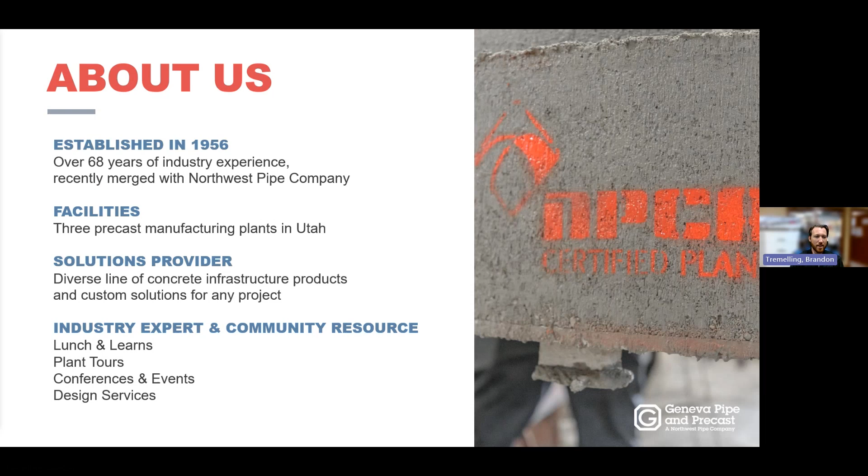I will introduce myself. My name is Brandon Tremelling. I'm the Technical Resource Engineer for Geneva Pipe and Precast, which means that my job is all about being an industry resource for our industry of engineers, contractors, agencies. My company, we've been around for 68 years now, and we were recently acquired by Northwest Pipe Company. So we're part of a much bigger national presence that provides ample opportunities for us to learn and coordinate and collaborate on different challenges that affect our industry nationwide.

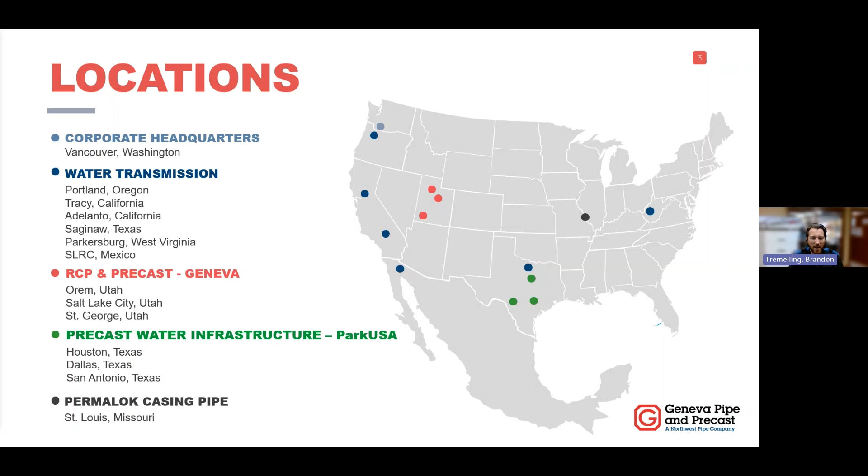So as I mentioned, we are part of a much larger group that provides ample opportunity for us to learn from each other. And our attendance today, the registrations we saw are from a pretty varied group. So some of the content that I'm going to cover today is more specific to Utah, where I'm based out of and where our Geneva pipe plants are located, those red dots you see on the map there. But if you have specific challenges somewhere else that may not be quite as relevant to Utah, please feel free to fill out that survey and we'll try to create content that might be more based on your local region.

So our agenda for today, I want to start off by talking about the impact of infiltration and inflow on sanitary sewer collection systems, and really what that looks like in terms of impacts you can have on your local communities, as well as the impact of cost in mitigation or even reactive situations. Then I want to talk about all the different points of infiltration and inflow in a typical storm sewer or sanitary sewer manhole. And we'll go through different ways to either protect or rehabilitate/mitigate these problems at those access points.

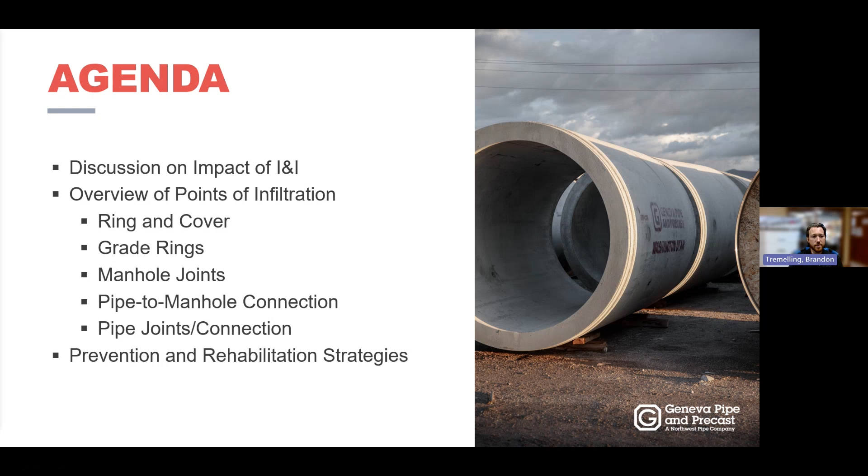And in doing so, I'm hoping that this will allow you to take this information back to your communities and really help make an impact, both by bringing down operational costs and really improving the level of service for our communities. So to start off, the effects of sanitary sewer overflows, that's what SSO stands for, are many. We have all sorts of things that kind of go into this.

We have infrastructure reliability. What is the impact of, let's say, a lift station being overwhelmed by influent water after a significant rain event? The public health and safety side of the sanitary sewer overflows into the environment, direct costs, which might be more the repair of overwhelmed infrastructure that has been damaged as a result of those overflows. And then indirect costs can be as simple as the downstream or long-term environmental impacts that will have to be mitigated in the future.

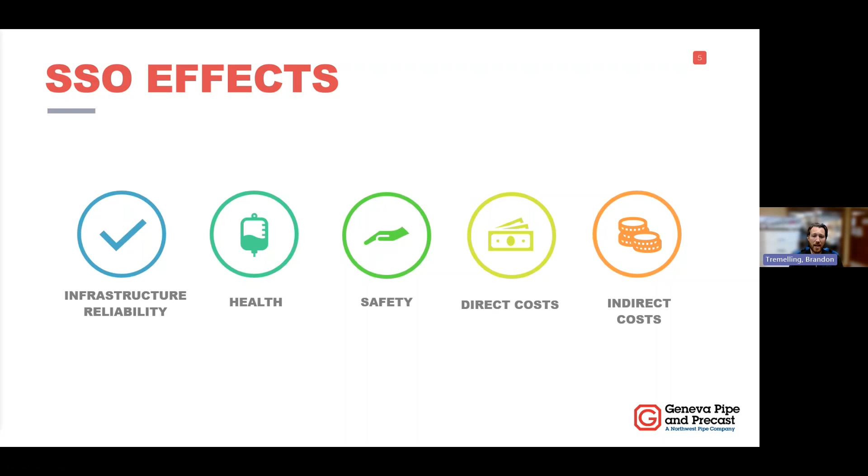So one example of this that I want to cover is the sanitary sewer overflow situation of Wake County, North Carolina. Now that's the Raleigh region, if you're familiar with that area. But as of this year, May 2024, there were more than 30 SSOs so far that had totaled more than 300,000 gallons of raw sewage spilling into the environment. Now, previous years have seen more than 500,000 gallons on an annual basis.

And when looking at the impacts of this, they were able to identify that specifically these rain events and the inflow and infiltration that they were seeing from these rain events were causing these SSOs based on when they were observing them. And it was pretty simple to track that, with such significant SSOs over time. But I thought it was interesting that in the case study for this particular area they had identified that climate change had a significant impact on this.

And as I was preparing this presentation, I found it quite fascinating to see that just this week this region had what is referred to as a 1,000-year storm, which means that there's a 1 in 1,000 chance that a storm of that intensity and scale will happen in any given year.

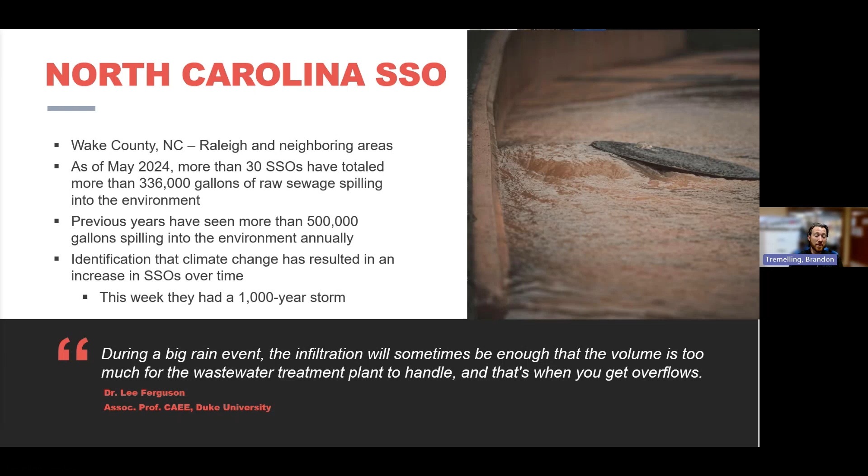And it happened. And so it's just a perfect example of how these things can be pretty unpredictable, but there are methods and strategies that we can use to try to mitigate them.

The next one that I want to talk about is the Carson sanitary sewer spill. This is in LA County, which is the most populated county in the entire country. This was an 8.5 million gallon spill that occurred when actually a pipe collapsed due to corrosion problems, which if you're interested in talking about the impact of corrosion on sanitary sewage collection systems, we have a full series of

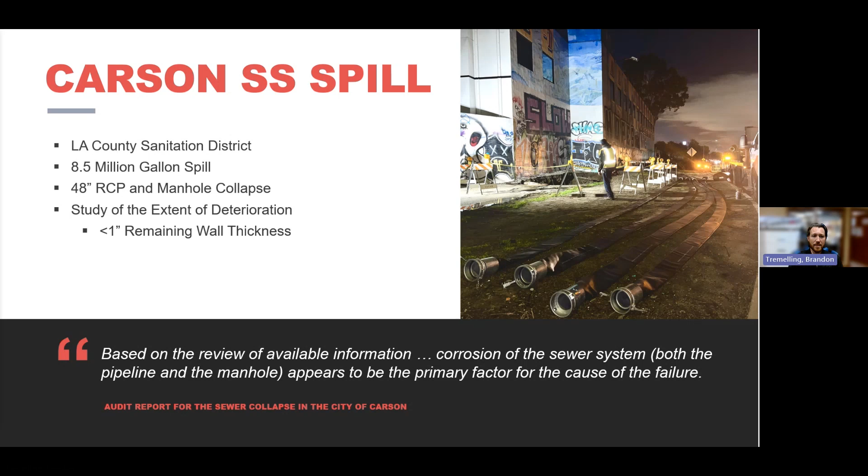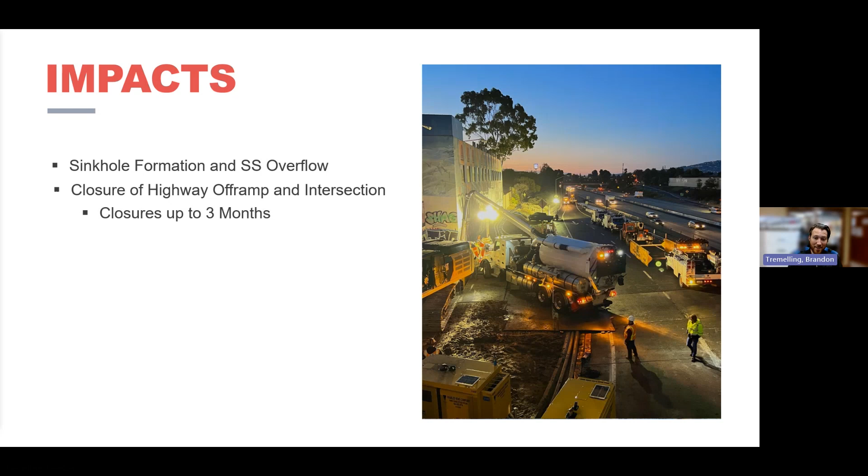But in this case, some of the impacts were there was a sinkhole that formed and an overflow that was the result of that deterioration, that collapse, and that sinkhole. Now, what happened was this occurred right off the side of a highway off ramp, and 8.5 million gallons has to go somewhere, right? Well, in LA County, they're right next to the beach, and all of that water flowed down the streets, down the different neighborhoods and things like that, and flowed directly into the ocean.

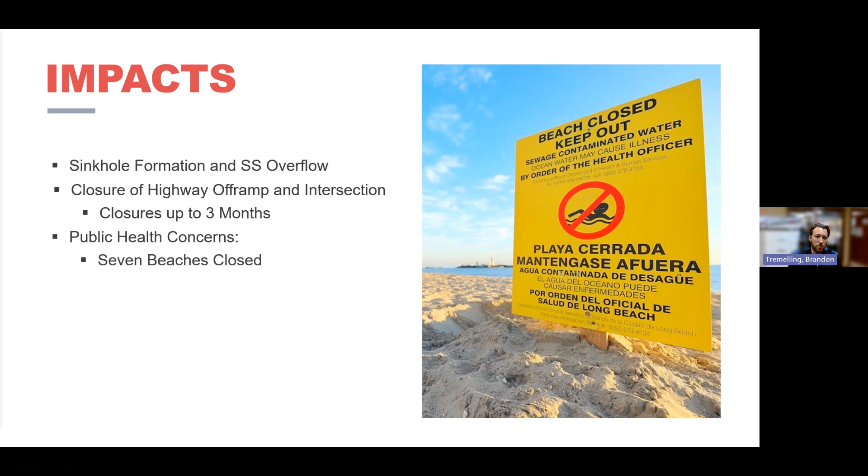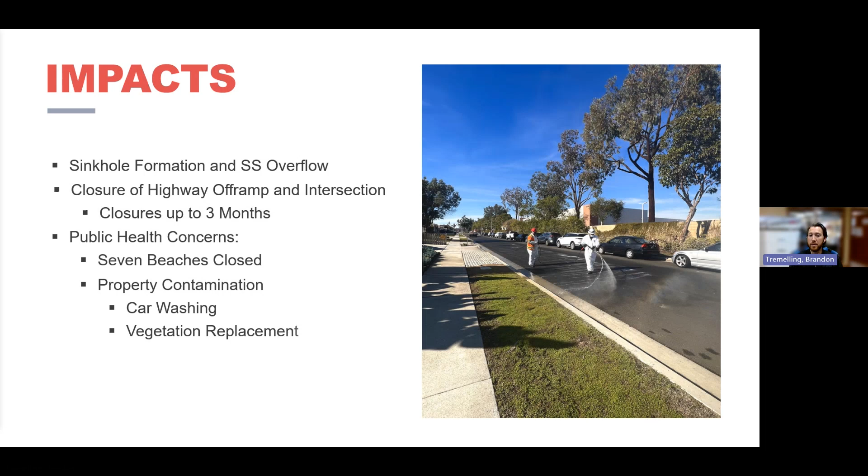There were 7 beaches that were closed, and along that flow path that this SSO took, there was all this contamination where they needed to wash the streets, the cars, even vegetation had to be replaced. I wanted to highlight this case study because it shows that there are sometimes impacts that we wouldn't really foresee. I don't think most people think about car washing as an impact or a cost associated with an SSO, but absolutely it is a public health and safety concern and therefore must be handled as one.

One of the interesting studies that came out recently from FEMA highlighted that as they go through all their different disaster response data and analyses, they've determined that on average, every $1 that is spent on proactive care is the equivalent of $6 of reactive care. So whether you've got an agency that's saying, I'd really like to have some of these proactive strategies, but we really can't afford it. In some cases, you can't afford not to have it because what happens when all of a sudden that 6 times higher cost comes as a result of one of these disasters?

And I wanted to highlight this little calculation of specifically the cost of I&I on a standard sewer agency. So if we were to do a sample calculation of a single manhole that had a 10-gallon per minute leak. Now, if we figure out what that is over the course of a year, we determine that it's over 5.2 million gallons a year that is leaking into this collection system. If we were to say that the average treatment plant cost per 1,000 gallons is only $2, that means that that single leak has cost over $10,000 a year.

And so as we start talking about proactive, reactive care, if we're waiting to do some of these mitigation strategies on a leak that's already happening, realistically, you're already spending the money to just treat that water that's coming through. We might as well go ahead and implement some of these strategies.

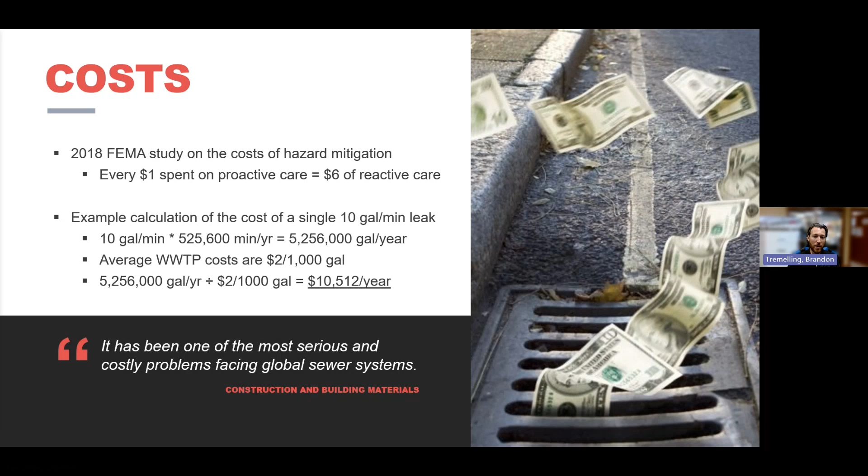So getting to the common access points for inflow and infiltration. The first one is probably the one that most people think about. We've got a storm and the nearest entry point for the stormwater to enter into a manhole is typically the manhole ring and cover. This is the typical manholes you see in the street. If you're not familiar, this is what is visible at the finished grade in the roadway or off in the right of way. That is the first access point for inflow.

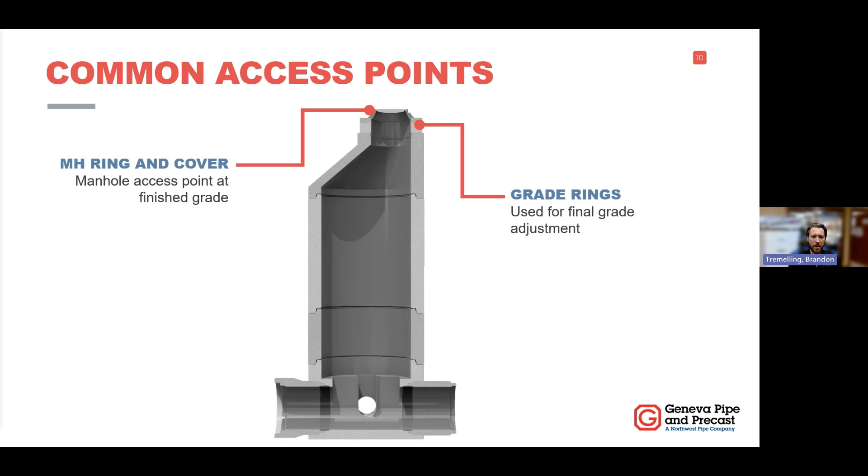The next is grade rings, which we'll talk about all these components in depth and different ways to address inflow and infiltration at these access points. But the grade rings are typically only used just to adjust that manhole ring and cover up to the finished grade to get as close as we can to that finished surface so we don't have big disruptions in our traffic patterns. The next one is the joints on our manhole.

The fewer the joints we have, the fewer the access points we have. And as you'll see, some of these strategies we're going to talk about actually work by reducing the overall quantity of access points in a manhole system. And by doing so, we can reduce the amount of inflow and infiltration we're seeing.

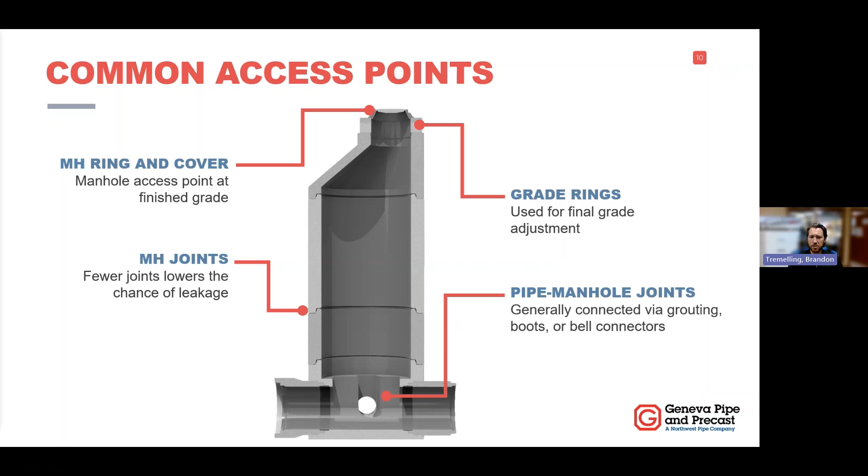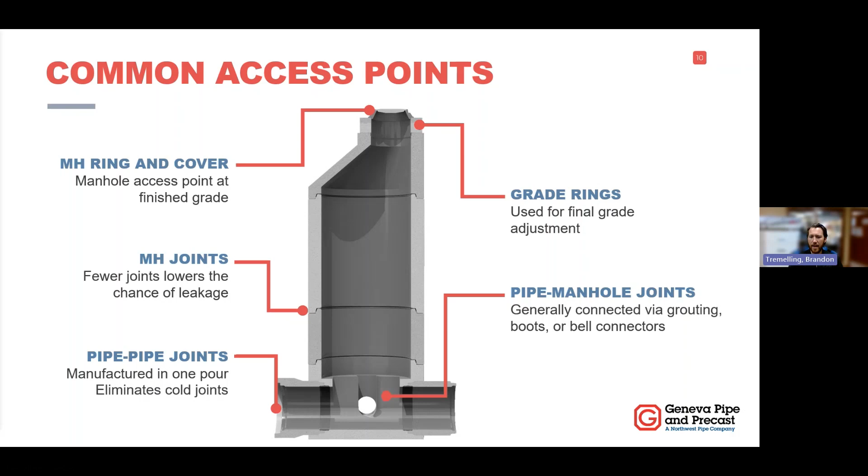The next one I wanted to highlight is our pipe to manhole joints. There's various ways to do this, but even if we're going outside of our manhole, I also wanted to cover our pipe to pipe joints and discuss the impact that that can have on a typical collection system. So let's go ahead and jump into it.

So starting with our ring and covers, I wanted to start by bringing up an interesting little fact that I learned through the course of the development of this webinar. What's interesting is I found that the origin of vented manhole covers comes from the occurrence of exploding manholes, back in the day when mechanics and gas stations and various industries would pour their waste chemicals directly into the storm system.

And I found this very interesting newspaper clipping from 1937, the Chicago Sunday Tribune, where a manhole exploded, flew 75 feet into the air to crash through a skylight and then fall and kill and injure a few people.

And so these manhole vents were originally developed to allow some of the concentrated sewer gases to escape and ventilate and reduce that explosive potential, which is rather fascinating now because we have much better environmental policies and standards. And now there are different impacts to having vented or non-vented covers, which we'll get into right now.

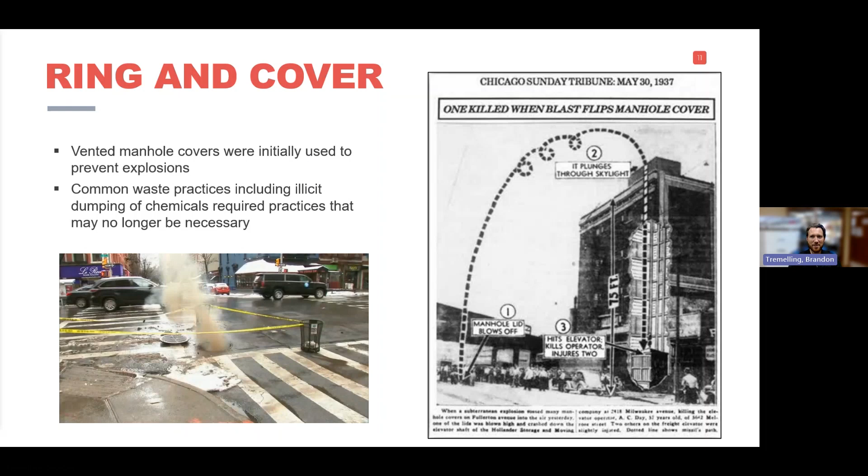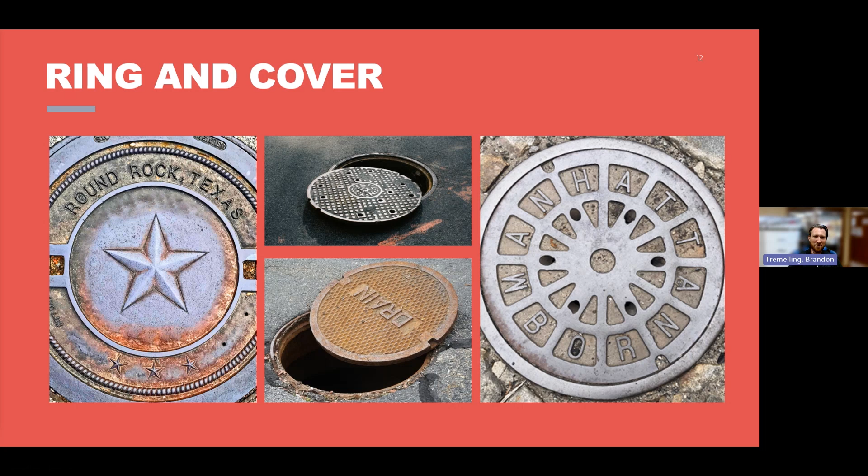So ring and covers themselves are rather interesting because there are thousands and thousands of designs, as each agency typically likes to have their own design or their own preference for whatever reason. And some of them are simply because you want a pretty one like Round Rock, Texas, or you want something that's simple and effective like anywhere else.

So the ones that I want to highlight today are specifically the A1180 ring and covers that are produced by D&L Supply Company.

The first one I want to talk about for the A1180 ring and cover is that there are various different cover options, kind of good, better, best options for whatever you might be looking for. Some of the variations on the covers for this combined ring and cover system include differences in the venting area, the lifting method, different patterns, strength capacity, or even a gasketed option if you want to eliminate the potential of inflow and infiltration.

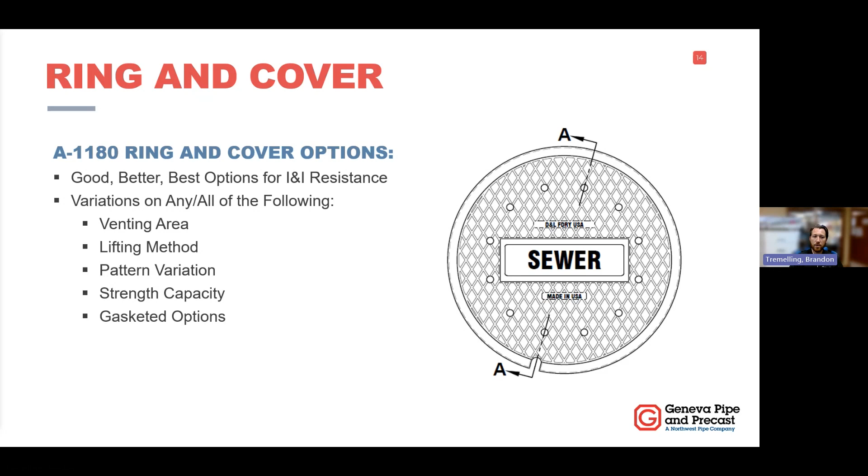You may think of an A1180 ring and cover as a single set that is what it is, but actually there are a number of covers that are available. We'll talk about a few of those right now.

So the first one is the 13 designation, the 12-hole vent cover. As I mentioned, I'm based out of Utah, and this is the most sold option in Utah. It is readily available and very common. Some of the considerations, I don't really want to say cons, when using this is that these 12 vent holes provide 7 square inches of open area for rainwater to flow in.

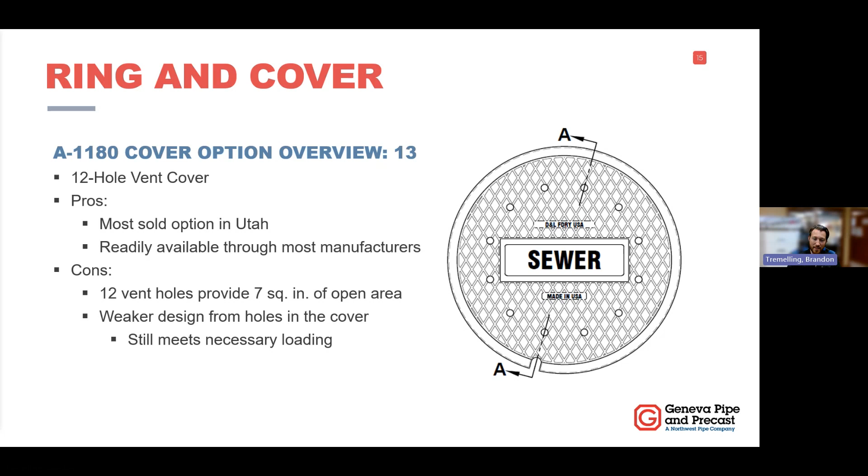Again, there's the benefit of having ventilation, but it depends on what your specific system needs are. And if you have a manhole that is for sure the entry point for significant inflow to your system, you may determine that this specific cover is causing problems. So that's the most common cover used for the A1180 series in Utah.

Just has that little notch for you to take your pry hook and hook that and pull that out. Very popular as well, and is a bit stronger than the 13 series because you don't have those holes, which can be fracture points or weak points in the strength of the lid.

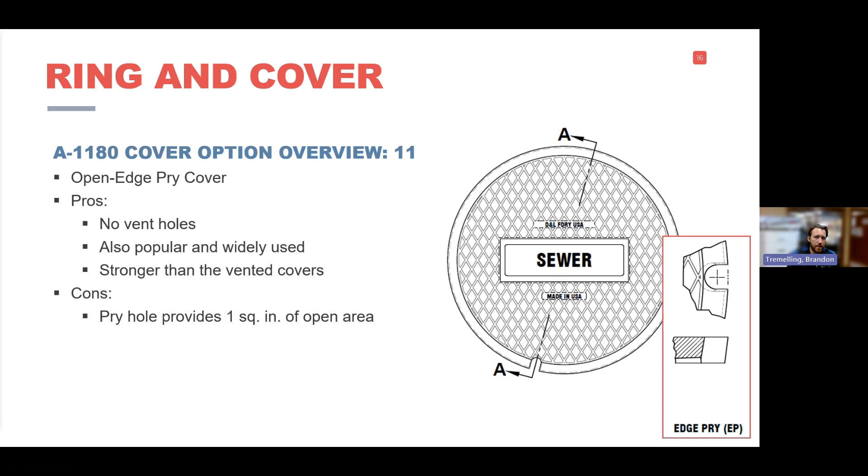The next one, if we wanted to go a step further and try to prevent any infiltration from the ring and cover, we can use what is known as the closed pickhole cover, or the subset designation of the 10 cover with the A1180 option. This has no venting area, and even though there is a small hole, or I guess we call it the pick hole, to remove the cover, it is actually fully closed and does not allow any ventilation or water to go in and out of this area.

Now, this comes with a gasketed option and a bolted option by itself. It can come without either of those. So if you just wanted a cover that just sat as the normal A1180s do without having a gasket or bolting it down, that is an option. But if you have a situation where you're seeing so much surging from stormwater, and you're seeing the ring and covers experiencing uplift, so the covers are being displaced from water surging out of the manhole, you might want a bolted option. You also might want a gasketed option if you want to prevent any water exchange back and forth.

Now, I will say these ones are not as readily available. There is typically a cost increase, and it requires a little bit more care to make sure that those pick holes don't fill with sediment, for example, which would be a challenge to remove. But for the ring and covers, at the time of new construction, when determining a ring and cover that's going to be most suitable for your manhole, there are options that I wanted to make you aware of.

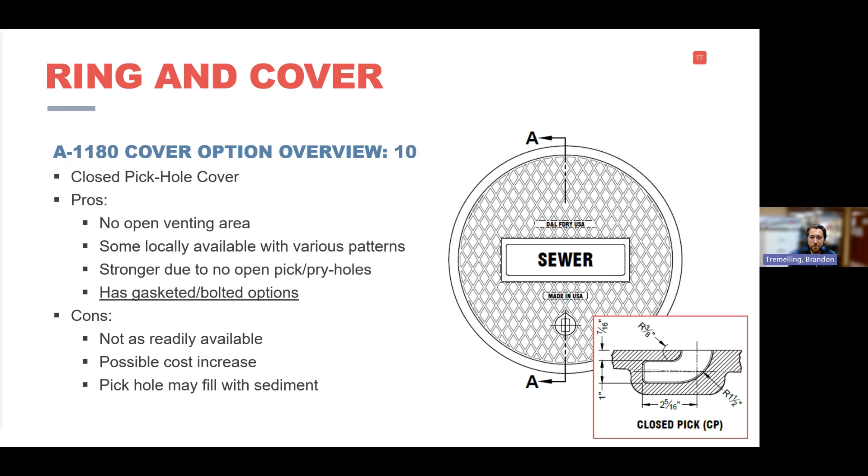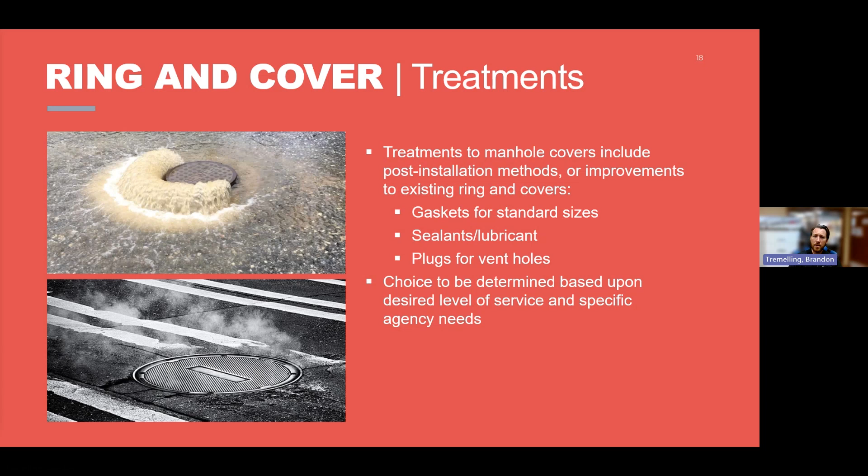But let's say that you have a ring and cover that's already in place and you want to protect it now that it's been installed against inflow and infiltration problems. There's a few ways to do that. There's gaskets that can be applied to most standard sizes of rings and covers. There's sealants and lubricants, and there's plugs for the covers that have holes in them if it is determined later that that cover should not have any vent holes. And that is just going to be determined based on your specific considerations and situations. But jumping into it, I want to first talk about the sealant applications.

The one that I want to highlight is called the Hercules Shutout Sealant, and that's produced by the company Oatey, the common plumbing supply manufacturer. This was co-developed when the Truckee Sanitation District, located near Lake Tahoe, California, determined that they were seeing significant increases in their sewer flow rates that were correlated directly with storm events. And so they started looking around for something they could do to their existing manhole ring and covers that would prevent water from getting in, if at all possible.

And they recognized that there were more extreme situations, but they just wanted to see if they could come up with some simple, effective solution to provide a sealant that would close off the joint between the ring and cover and prevent water from just flowing around the cover. So they started testing and working together, and they created this Hercules Shutout Sealant, which creates a water barrier between the manhole ring and cover. Some initial studies have shown significant reductions in inflow.

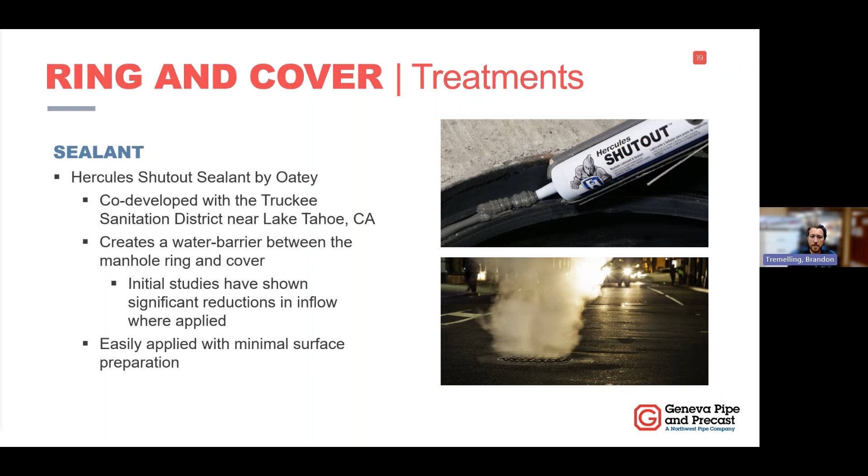You can find this product on the Oatey website, and you can read through some of those studies that are a little bit difficult to compare, I guess, because storm hydrology can be so unique to different regions and topographies. But you can take a look at that evidence and decide if that's something that would be effective and useful for your system. But the application is incredibly easy, very minimal surface preparation, and a rather simple approach to preventing this leaking into the sewer system.

The next one that I want to talk about is the manhole lid gaskets that are manufactured by the company Cretex.

These can be easily ordered based on pretty standard manhole ring and cover dimensions. There is a very simple sealant that is applied. The gasket is set with, again, pretty minimal surface preparation.

And so one of the benefits of some of these methods is that if you have installed a run of pipe, let's say you put in a new trunk line or a new area of your system, and you're not sure yet where you're likely to see the most inflow problems, these methods allow you to go ahead and install your manholes and then retroactively go back after you've determined which are going to be the most problematic, I guess, for letting the stormwater into your system, and then apply these rather simple treatments to prevent that moving forward.

So this one also helps with reducing sewer gas ventilation if that's something that you're looking to limit. But this is a very simple approach to simply gasketing that.

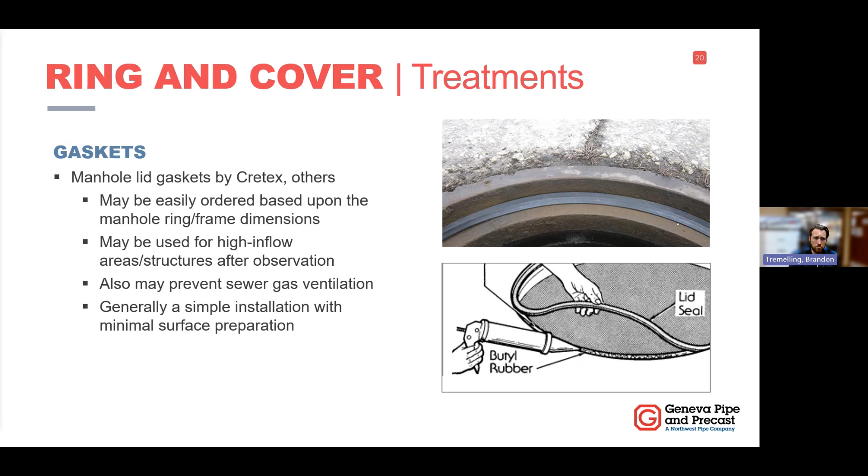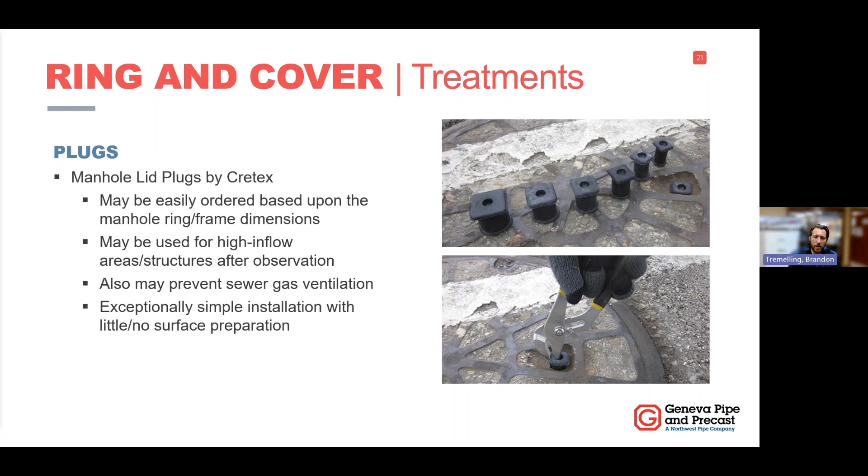But I want to point out that anytime that we are limiting the ventilation of gases out of a manhole, we are actually potentially causing problems. And I'm not talking specifically about explosive potential like back in the 1930s. But what I am talking about is when we are trapping the gases of a sewer collection system in the manhole, there are corrosive elements in those gases that, if left untreated, the manhole structure, a concrete manhole that is, can be attacked by those acids and will cause degradation, corrosion, deterioration of that structure.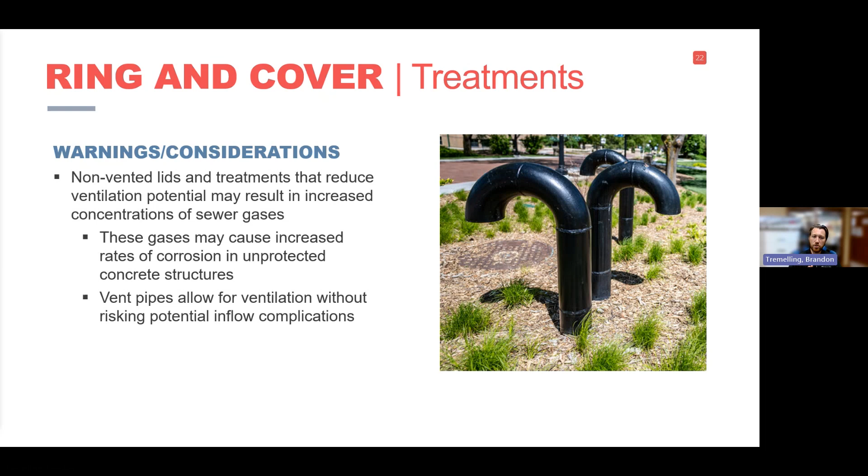And so there are ways such as vent pipes that can be used that are not going to be really a risk for increasing infiltration and inflow, but can allow some of that ventilation to clear out some of those concentrated sewer gases and reduce the likelihood of seeing structural deterioration. So just want to throw that out there when we're talking about some of these ring and cover treatments.

But to move on, I want to talk next about grade rings. Now, I think grade rings, in my experience, are some of the most common areas that we see this infiltration going into the manhole. This one is a rather extreme example. But I want to point out that because grade rings are used to adjust the ring and cover to final grade, sometimes we want to be really careful with the increments and we want to use smaller grade rings.

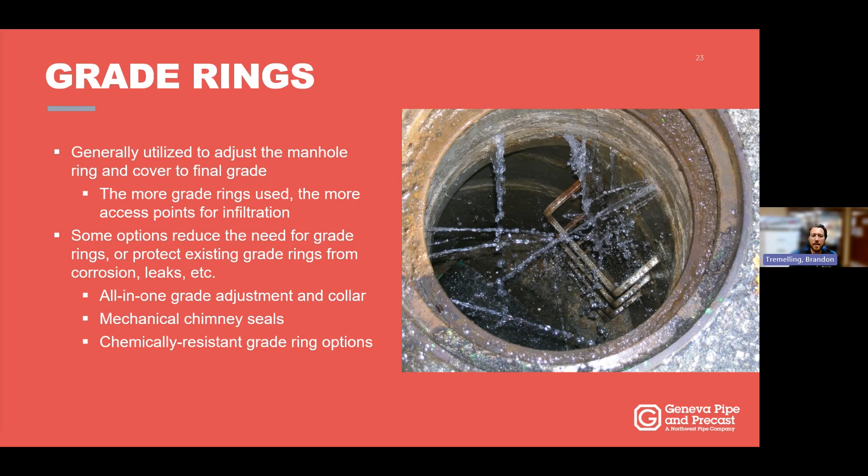But the thing is that the more grade rings that we use, we've created more joints in our overall stack up of that manhole from base to ring and cover, meaning that there's more points of entry or access points for groundwater to seep into our system. So in some ways, we want to limit that. And there's a couple of ways that I want to go over with you right now.

The first one is the whirligig system, which is a rather simple method for doing kind of an all-in-one grade ring collar for the manhole ring and cover. Now, if you're not familiar, the collar is very important for the manhole structure because it prevents the ring and cover from shifting. It helps hold it down. It helps provide a distribution of loads over it. And it also can help prevent any water from getting in, down, around the ring and cover and deteriorating or moving some of the sediment there to create weak points under the asphalt and deteriorate a road, for example.

So the whirligig system essentially will cut a form for a concrete collar to the finished grade, to the correct height, that the ring and cover can set on perfectly, and that will allow that ring and cover to match the slope of the road, and it will provide support all around that ring and cover. And what's important to this conversation is it reduces the number of access points or joints versus typical grade rings, because now it is all one single piece of concrete versus a stack of individual grade rings.

So this is an interesting one that could be used for both new construction, or if you have a manhole where you're starting to see the asphalt crack and deteriorate around an existing manhole, or you're seeing infiltration at the grade rings. This can also be used in a rehabilitation application.

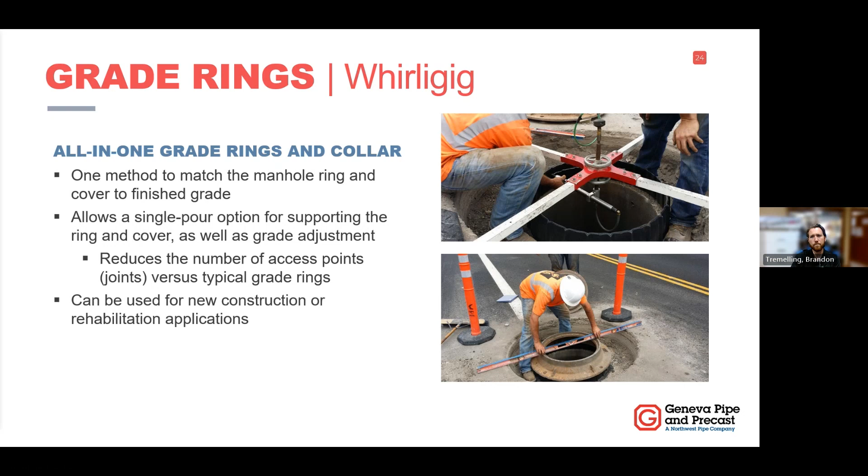Next one that I want to highlight are our chimney sleeves. Now, these are the internal and external chimney sleeves manufactured by Cretex. You don't need both. It would be one or the other. But oftentimes in a rehabilitation situation, we only have access to the inside. So these are rather simple in their application.

They are rubber bands, essentially, that are pressed against the grade rings and prevent water from even reaching the access points if you're talking about the external chimney sleeve. And if you're talking about the internal chimney sleeve, we're using compression rings to force that rubber against the grade rings and hold back any water pressure that has attempted to infiltrate between those access points.

Now, these meet some of the industry accepted specifications for resilient connectors. If you're not familiar with that term, it's pretty specific what goes into what a resilient connector is. But in this case, these chimney sleeves meet those standards and specifications.

And an interesting study produced by ASCE reported that these mechanical seals, which rely on the compression and tension in these bands around the rubber, can be expected to last up to 3.5 times longer than some of the chemical sealing methods where you're painting a type of sealant onto those grade rings.

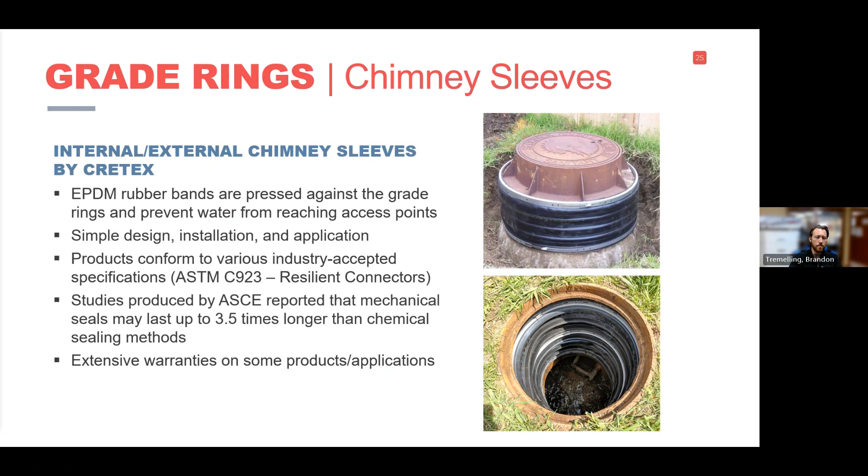The last one that I want to talk about is also produced by the company Cretex. These are the Cretex Pro rings, and I just generically called them the corrosion-resistant grade rings. The reason for that is because they are made of expanded polypropylene, which means they are incredibly lightweight. They've got a 100-year design life, and they are very, very corrosion resistant.

Now, why do I really care about corrosion resistance right now when I'm talking about inflow and infiltration? Well, like I mentioned, some of these sewer gases can directly attack the grade rings and any exposed concrete, really. And that attack can cause those elements of the structure to deteriorate. And as they deteriorate, they may create weak points, and those access points may become easier for water to force its way in and cause problems.

And you might see increased inflow and infiltration over the lifespan of that structure if we are allowing corrosion to play its role.

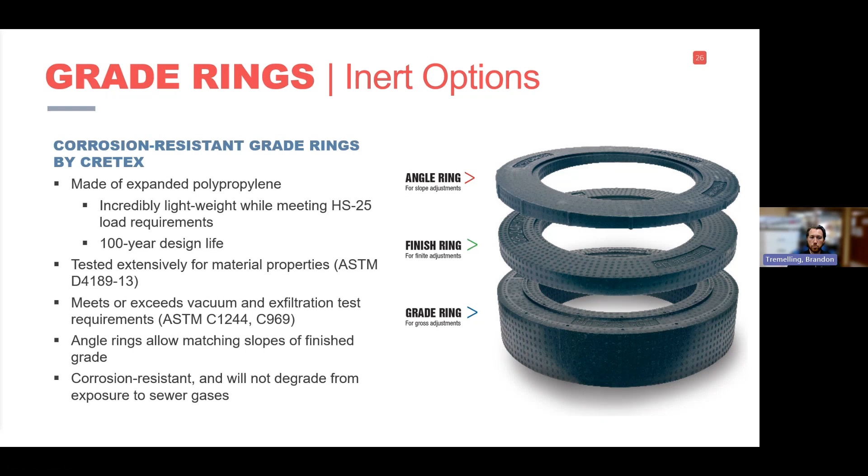So the manhole joints are the joints that connect, if you have a cone, the cone to a riser to the manhole base. And generally these are sealed with mastic or a butyl sealant, but some of the things to consider when using these sealants are that performance of that joint is going to be highly dependent upon the installation of that mastic.

And as we're loading the mastic on that joint, the idea is that it is, first of all, sealing the joint. But second, it's allowing some of the load distribution and some of those micro variations in the joint of the manhole. So that way we're not point loading the concrete, we're not creating possible fracture points for the concrete, and we're essentially creating a cushion between the bell and spigot ends of these manhole joints.

But if we have even a slight gap in that, that's not necessarily going to compromise the structure, but it could dramatically impact the inflow and infiltration resistance. So we've got a couple of rehab applications that we can talk about specifically for addressing the leaks in a manhole joint.

And then we also have an option for if you've got a new installation going in where you know that this manhole is going to be deep and there's groundwater nearly to the surface and you can expect a lot of head. And we'll just go ahead and jump into that.

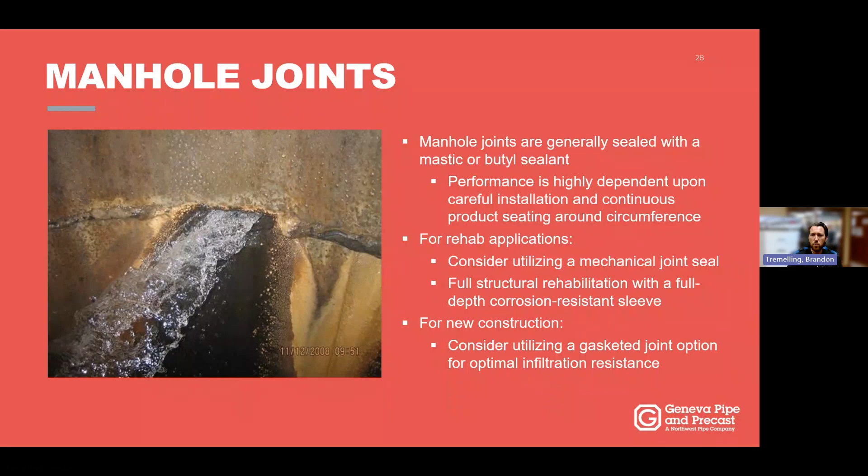So the first one that I want to talk about are mechanical seals. Now, these are very similar to the chimney sleeves that we just talked about. They're pretty similar, and they're designed for head pressures of up to 14 feet.

Essentially, again, you've got a rubber seal that is going to sit over that joint. They come in different sizes, so depending on how much coverage you need for your specific joint, or let's say you have an offset joint, or for whatever reason your structure is a little bit out of round, or something like that. These seals, because of the multiple compression bands that are on them, can be tightened to different levels. So that way we're accommodating for some of those variations.

This specific product here comes with an advertised 50-year warranty. So again, if this is something where you've got a manhole that you know is gushing water, spraying water, and you need something that is going to have kind of a heavy duty sealant on that joint, this is a possible option in contrast to some of the more typical chemical sealants or injection grouting or things like that that are more common, but in my experience, aren't always the best application.

So we're talking about these mechanical seals. The next one is, let's say that you have a manhole that has experienced some structural degradation. Maybe there's significant cracking. I had an engineer reach out to me recently with a manhole that had a vertical crack in one of the risers running from joint to joint and was spraying water the entire way. And he said, "You got anything that can deal with this?" And I said, "Well, if you're looking to simply patch that crack, probably not.

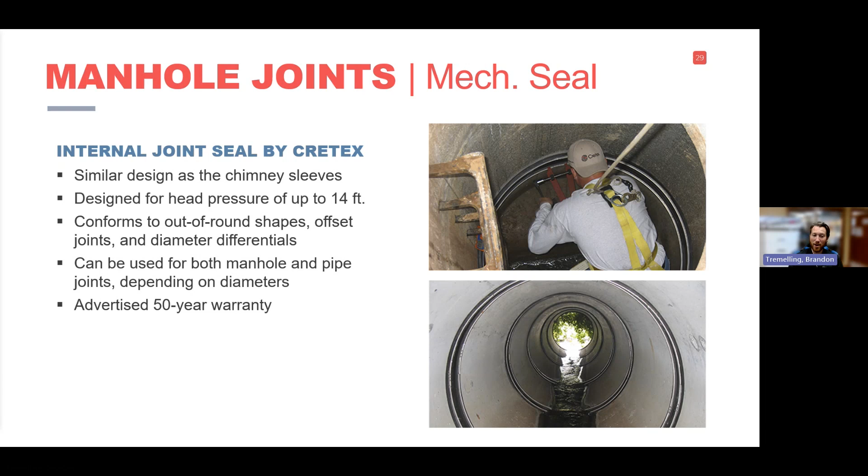But I know of a product manufactured by Geneva Pipe and Precast that allows for a full sleeving of a structure that from the flow line of that manhole all the way to the top can seal up and remove some of these access points." So this is called the hybrid PVC manhole for rehab. And essentially what it does is it takes an existing manhole structure and sleeves the entire thing from the flow line to the grade rings, essentially, and provides a fully structural rehabilitation.

The rehabilitation itself takes about 8 hours per manhole. It can be done in live flow conditions, which is almost unheard of for some of the rehabilitation methods that get down into the flow line, especially when you're comparing to some of the chemical sealants. But because we are removing some of these access points, because we are having a single sleeve up to 20 feet in height for these manholes, we are reducing all of the manhole joints entirely.

And in addition, what happens between the sleeve and the existing structure is a high flow, high strength grout is poured, which will work its way into any of those cracks, existing joints, any access points, and seal those up in addition to the sleeve. So this one has a 50-year warranty against corrosion. And so if, again, you're talking about trapping sewer gases and potentially impacting your system in that way, this is an excellent option for that.

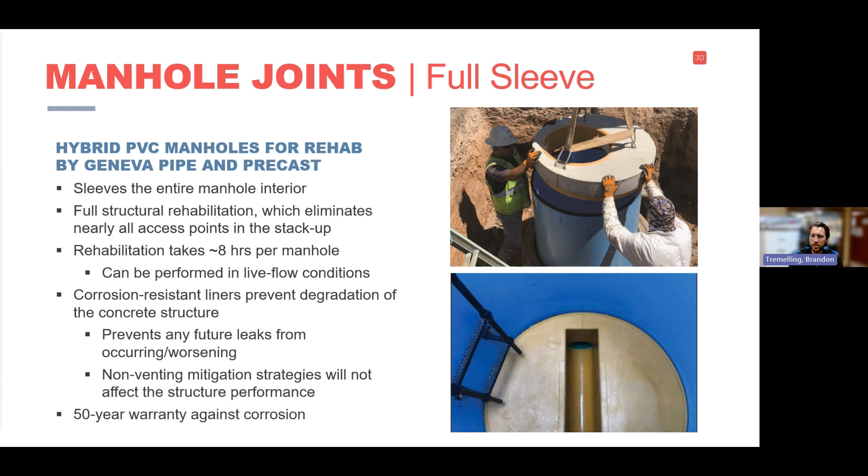Now, let's say you have a manhole that, again, you know is going to be 20 feet down and you've got groundwater up to the surface, and even in the design phase that infiltration and inflow are going to be a major problem. The next one that I want to talk about is gasketed manhole joints. Now, I want to highlight this in the context of the Perfect-Lined manholes that are manufactured again by Geneva Pipe and Precast. The design of this manhole structure is that every joint is gasketed from the base all the way up to the grade rings. The joints are resistant of up to 30 feet of head pressure.

And in addition to having the joint resistance for inflow and infiltration, they're also fully lined with corrosion resistant materials such as fiberglass reinforced polymer for custom shapes and configurations of manhole bases, as well as cones, or if there are any specific features, like we've got a lift station where we need pipe inlets and outlets, or mounts for, let's say, a pump or any sort of monitoring equipment, things like that, that can be fully accommodated. And because all of the joints and access points are either welded shut or are gasketed, it prevents any future leaks from occurring or worsening, and also the non-venting strategies will not affect the structure performance.

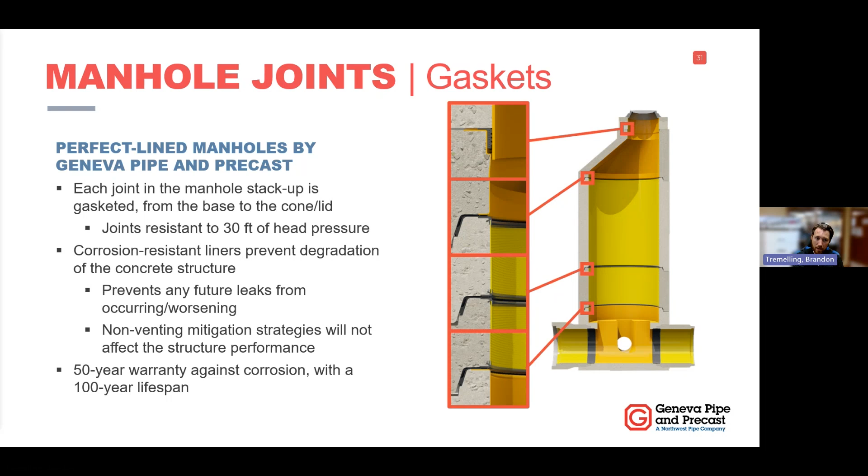This method also comes with a 50-year warranty against corrosion, just like the sleeving option does. And this structure comes with a 100-year lifespan. Just to give you kind of a snapshot of what the joint looks like, we've got this gasket that rolls down over the entire spigot, seals directly against these corrosion-resistant liners, and provides excellent joint resistance against infiltration and inflow.

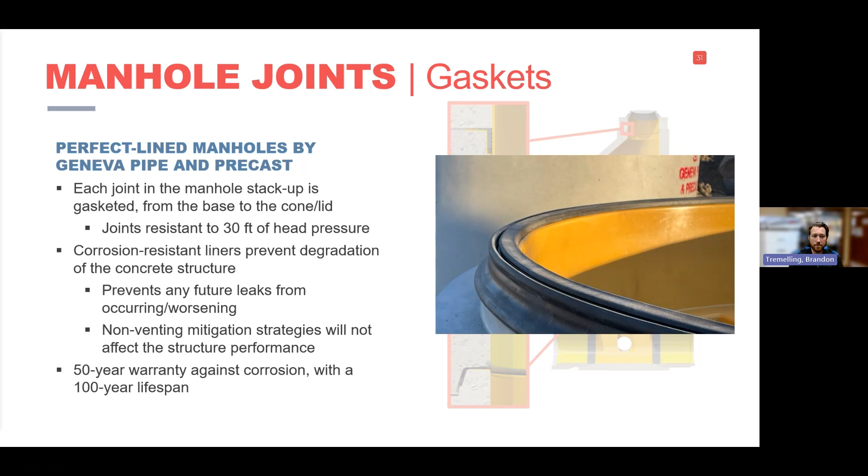To give a full stack up of what that product looks like and some of the benefits. Again, we've covered some of these things pretty in depth in some of our other webinars, so please feel free to reach out or look us up and you can probably find those.

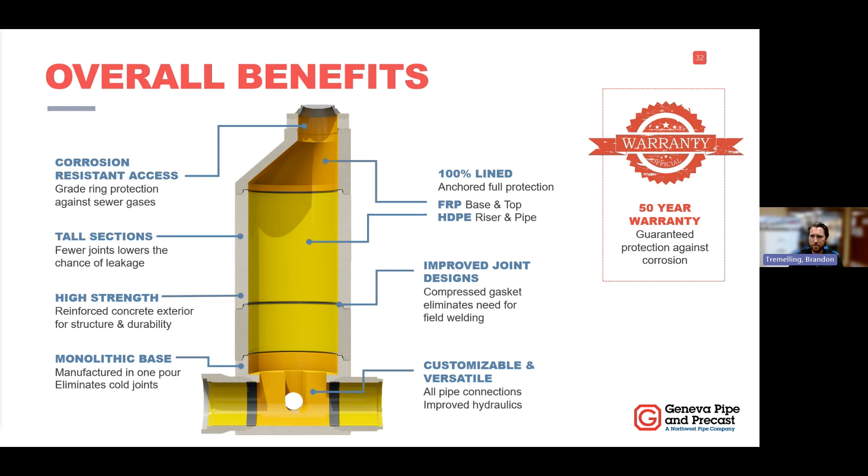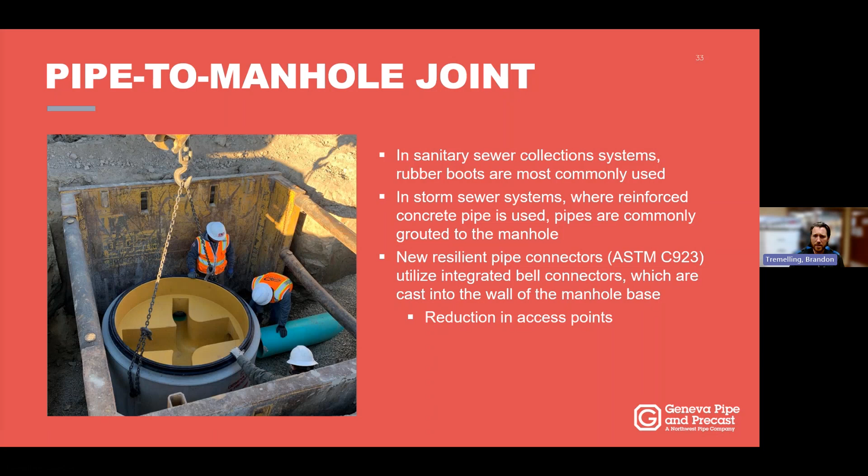But the last one, because I want to hurry and get through this, that I want to talk about are the pipe to manhole joints. Now, typically rubber boots are used in a sanitary sewer collection system, but we still see grouted manhole to pipe connections. And I want to talk about one new approach to pipe to manhole connections as well.

Now, rubber boots are pretty widely industry accepted, and the only installation problems that I wanted to just highlight for possible causes for I&I are misalignments of that boot, over or under tightening these compression rings, and improper surface preparation. So, for example, if there's a little piece of gravel or something that is going to affect how that boot sits, it can create very easily an access point for groundwater to flow in.

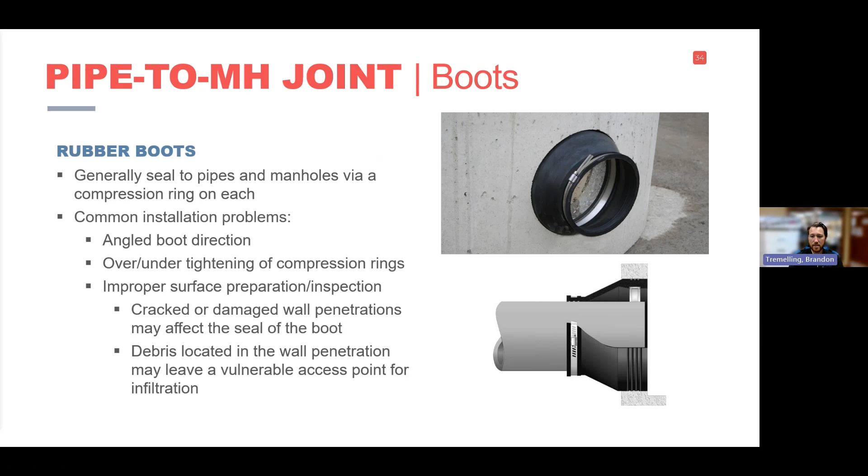Finally, grouting. This is one where typically if you have a concrete pipe coming to a concrete manhole, that's most typically where we're seeing a pipe getting grouted in. But you just need to be really careful that that pipe is well supported before this stage, because if not, the weight of itself and any possible construction loads over top can crack that pipe. And so just need to be very careful that the pipe is centered, is not going to be moved, is very secured and protected against overloading.

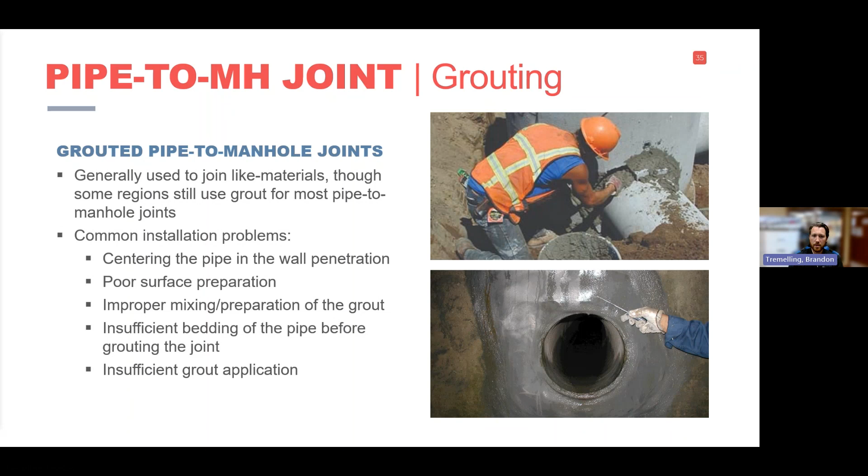Final one I want to talk about here is the cast-in bell connectors in manhole bases. Now, this is a rather new technology where in this case, in these photos, these connectors are used with a liner that is then cast into the concrete. So when a manhole base is delivered on site, you already have this pipe to manhole connector that is cast into the concrete, has an integrated gasket, and the way that it's designed, a pipe coming into the manhole will match the flow line of the base based on the positioning of that connector.

And again, just like what we talked earlier with the boots being kind of flexible and able to accommodate slight variations in the field, so can these connectors with the gaskets accommodate various deflections in the field and can be manufactured to accommodate significant slopes coming into or out of a manhole. But these perform excellent protection against inflow and infiltration.

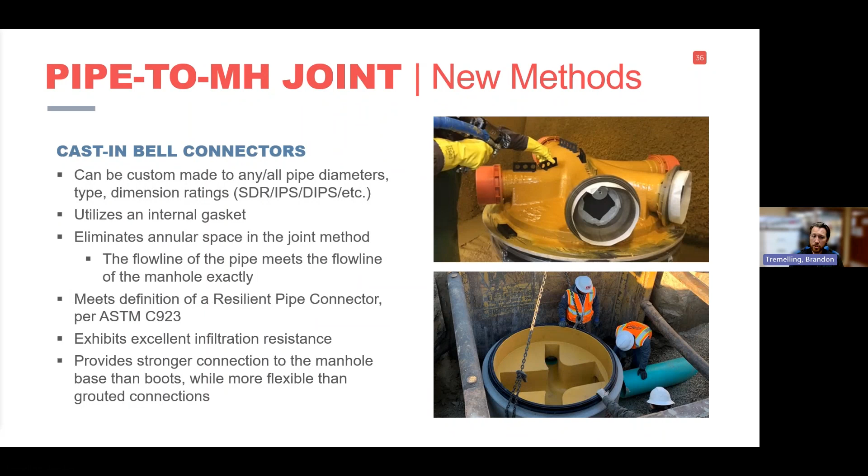And again, I apologize. I'm going to have to start going quickly because I over-prepared for this webinar, I think. So I'm actually going to skip this quiz right here just to keep going.

But I finally want to get to our pipe-to-pipe joints. The pipe-to-pipe joints generally perform really well, especially when we're using PVC pipe that's gasketed. Generally, the joints perform pretty well, but there are a few considerations that can impact how that joint performs. One of them is debris in the joint, just like I mentioned with the boots. If there's any gravel or something like that, that's going to affect how that pipe fits together. That's a very easy access point for any pressure in the groundwater to just force its way in.

Over lubricating can sometimes cause a gasket to roll. Under lubricating can tear a gasket. And finally, angled insertion of a pipe can either crack it or can cause the gasket to fail. Finally, improper backfill and compaction definitely play a role because some pipes are more heavily reliant on proper bedding and backfill practices. So if it's not done well, pipes that aren't inherently structural themselves can quite easily get out of round, can crack and break, and again, create access points.

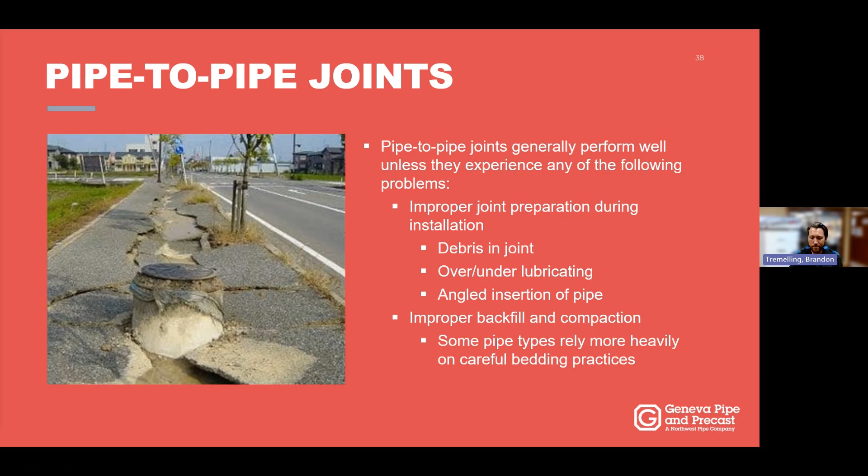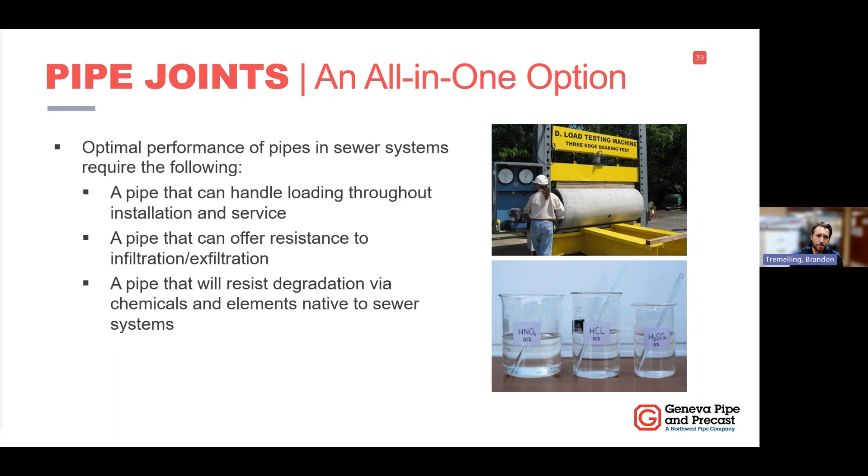So one of the kind of optimal ways to address the pipe joints is having an all-in-one option. Now, what I wanted to highlight here is a newer product that is designed to handle loading just as concrete pipe does, but it also offers exceptional resistance to inflow and infiltration. And finally, resists the degradation that occurs from some of these sewer gases that may build up if we're using the non-venting mitigation strategies. So the way that we can do this is by using a lined pipe that is rigid in nature, not a flexible pipe.

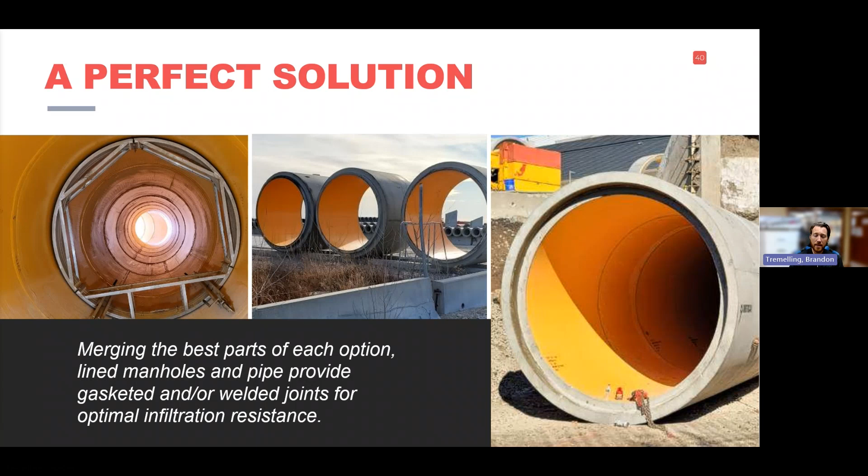So rigid being concrete pipe, and then using the HDPE liner that provides the corrosion resistance. Now, for large pipes, what we can do is we can weld these HDPE liners together, fully eliminating the access point of these pipe joints.

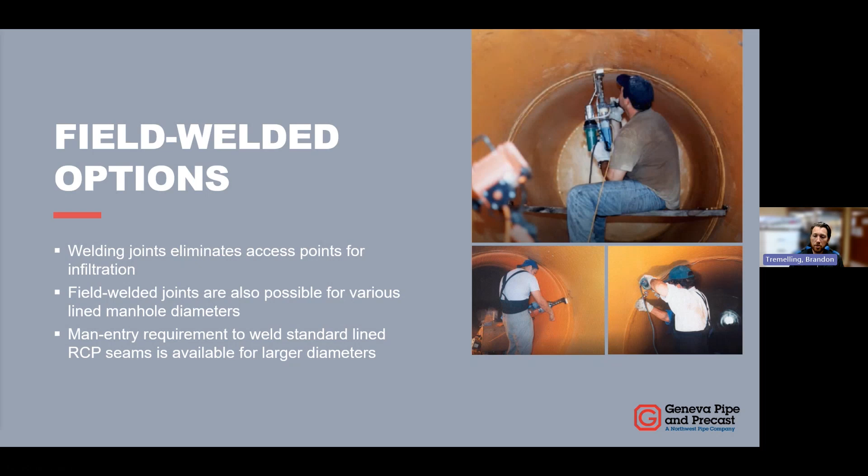So that is one method to eliminate those access points altogether and provide incredible structure as well as corrosion resistance. But those typically are only feasible for very large pipe diameters. So for small pipe diameters, what we can do is we have what we refer to as our Perfect Pipe, where all the pipe joints have, as you can see here, these black bands that we refer to as our couplers. These couplers have gaskets on both the upstream and downstream side. So these joints are double gasketed, fully protecting against infiltration and inflow.

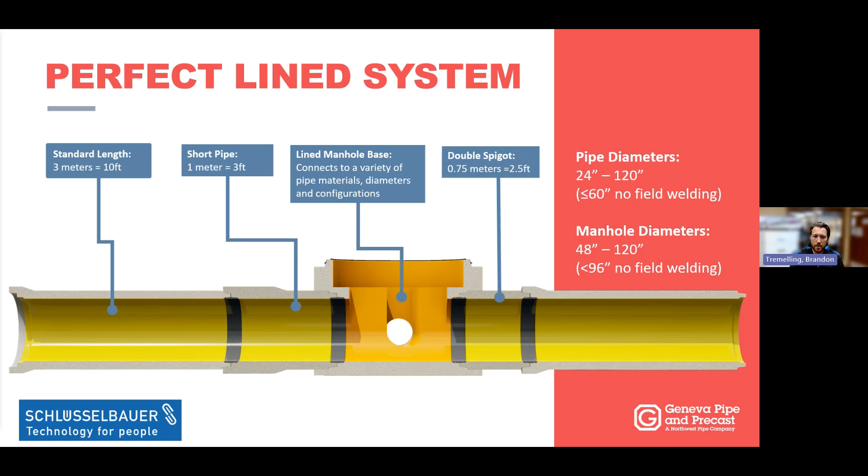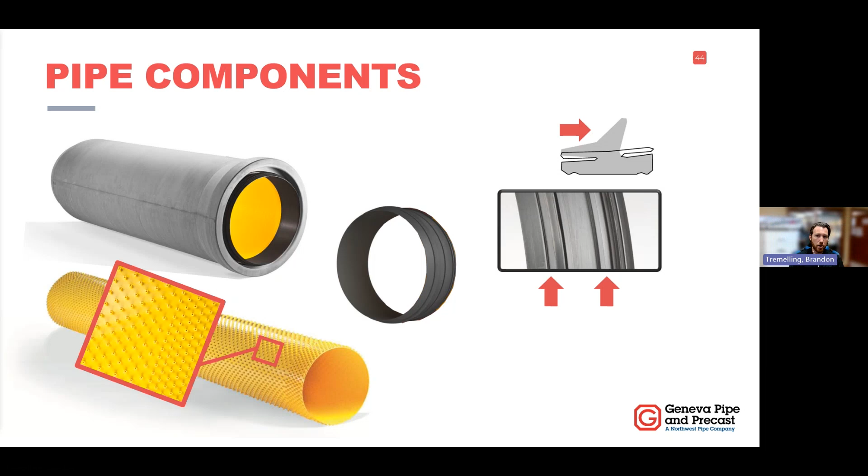This is a photo of what our Perfect Pipe looks like. And the components are our typical concrete pipe. Could be made to any class, any specific loading considerations that we need. Generally, standard concrete pipe diameter starting with 24 inches. But they have these black couplers that have two gaskets, and the HDPE liner inside is covered in these anchors on the backside. That when we cast it into concrete, it locks that liner in place and prevents any possible delamination from occurring.

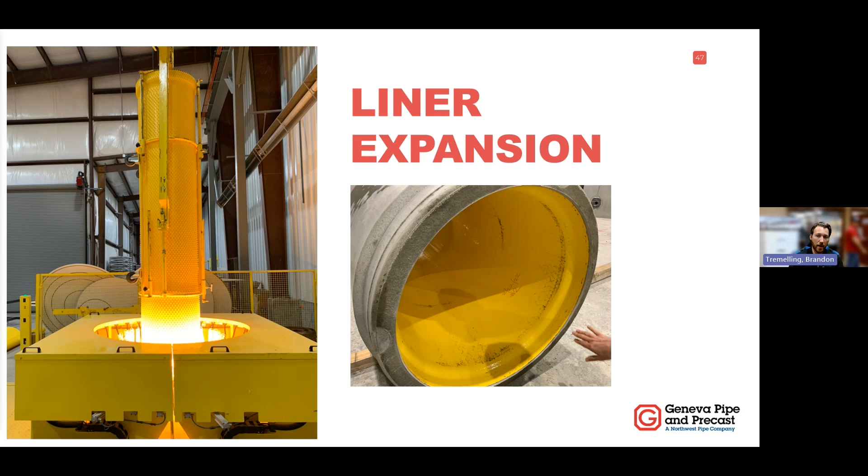The way that we manufacture this is we weld the liners together. We spark test every single liner, every single weld. The liner is then expanded, so that way in that photo on the right, you can see there's an internal bell where that coupler will sit, so the flow line is not impacted in any way. We then slide that over our forms, we pour our concrete, we allow it to cure, and we strip it. And that's essentially our Perfect Pipe.

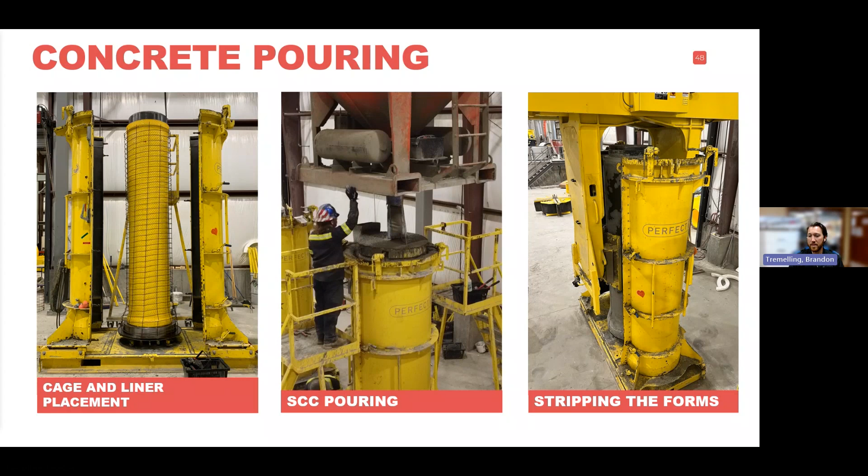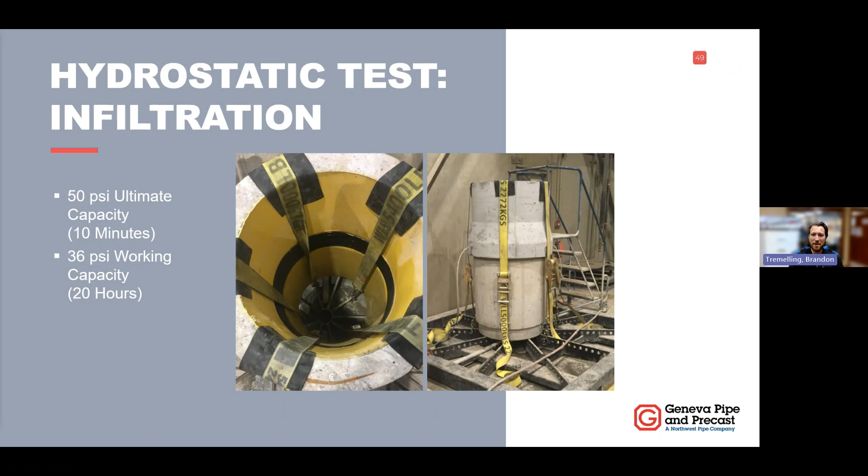Some of the benefits of this pipe-to-pipe joint is that we have tested for infiltration and exfiltration resistance. It's been tested up to 50 psi for its ultimate capacity. We tested it at 36 psi working capacity for 20 hours. And let's be honest, that is a lot of pressure. If we're talking about head in groundwater, that is excellent resistance to I&I. And I'm not even going to go over exfiltration because that's not really what we're talking about. But we have tested it up to 60 psi and it performs very, very well.

I want to cover really quickly the strength of the liner. We've tested that as well. And again, the delamination potential of the HDPE is virtually non-existent. And in some applications, the HDPE liner is stronger than concrete in tension. So it's an excellent product when we're talking about durability, corrosion resistance, and joint and I&I resistance.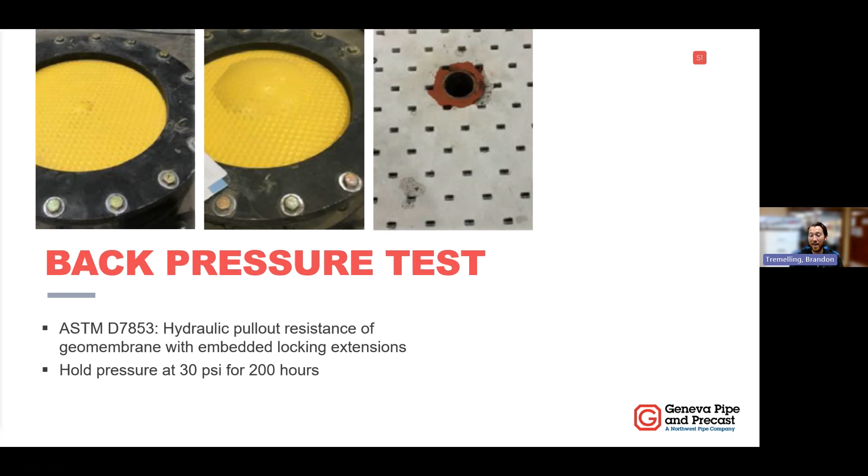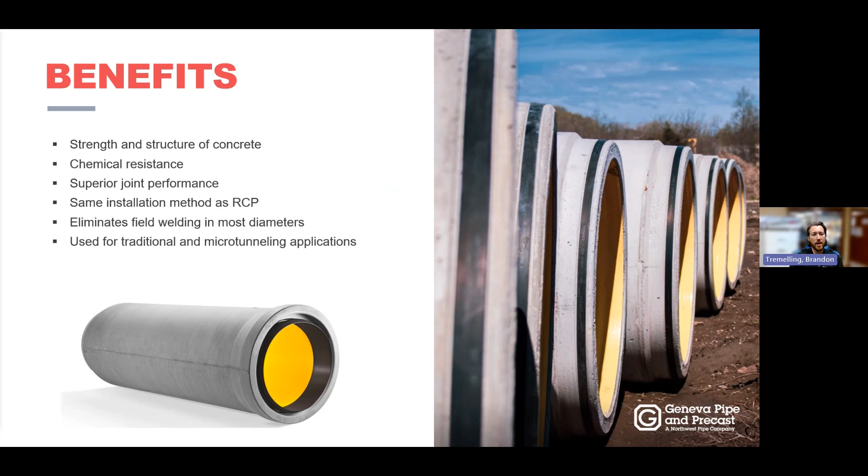Here's some of the benefits, and I want to spend the last little bit talking specifically about a case study where this Perfect Pipe was used, and that would be the 950 North Sewer Trunk Line in the Central Davis Sewer District here in Utah. Now, the project considerations were that there was 3,400 linear feet of sewer pipe, 12 manholes. It was bid with various pipe materials, but the district decided to go with Perfect Pipe for a couple of reasons. There was exceptionally deep installation, groundwater was nearly to the surface, and there was going to be a major highway constructed directly over this pipe.

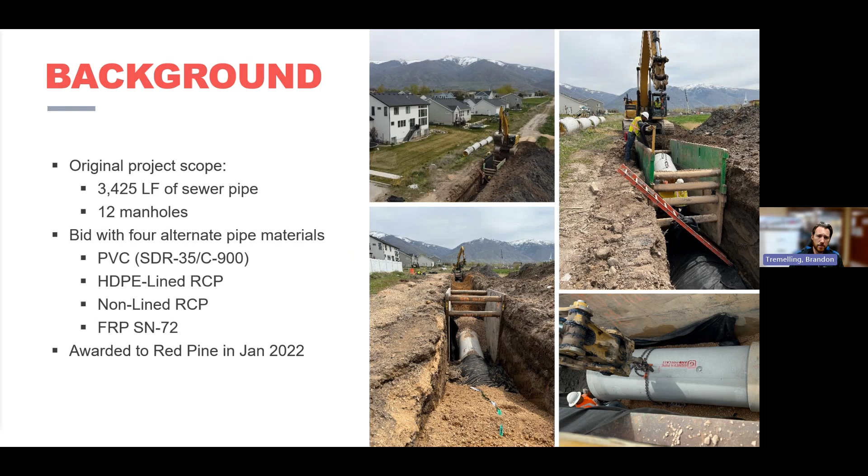So they needed all those things. They needed the durability and strength of concrete pipe, something that wasn't going to deflect or be entirely reliant on the installation practices. They needed something that was going to resist the groundwater pressure trying to force its way into the pipe. And because there was going to be a major highway constructed over, they wanted to make sure that there weren't going to be any corrosion problems in the future, and so determined that they wanted to be proactive in protecting this pipeline against possible corrosion and deterioration there. So that was one that was fun to do here in Utah.

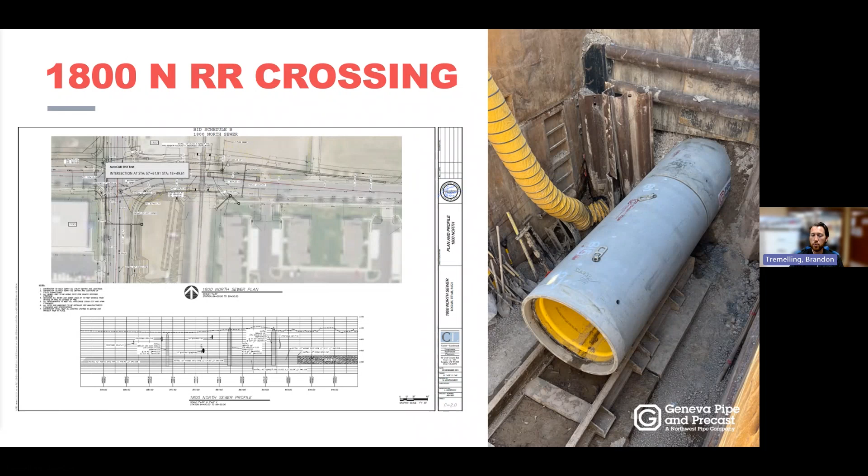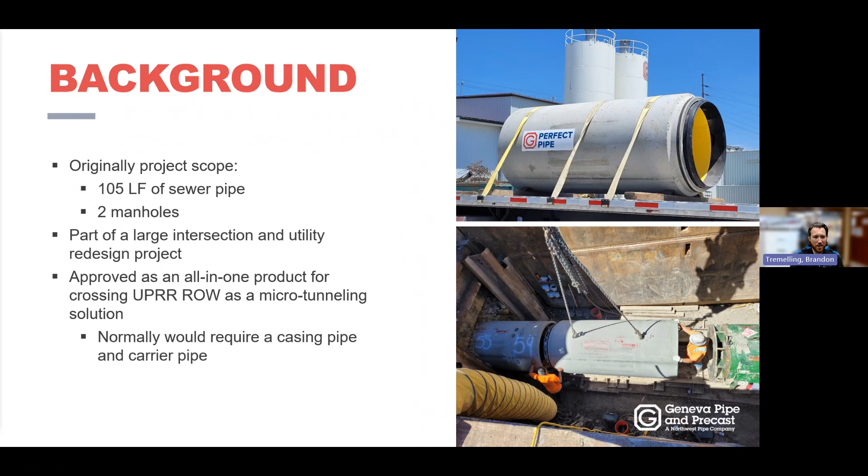Another one that was interesting to highlight was the 1800 North crossing in Logan, Utah, where we manufactured jacking pipe with HDPE liner. So they didn't need a casing pipe and then a carrier pipe, as typically is done in micro tunneling applications, but they had kind of an all-in-one lined jacking pipe that allowed for direct flow, called a one-pass solution for this application. This one was only over 100 feet that connected to two manholes, but went right under a railroad, which normally would have required a casing and carrier pipe. So that is kind of a benefit of the pipe-to-pipe connection application of this specific product.

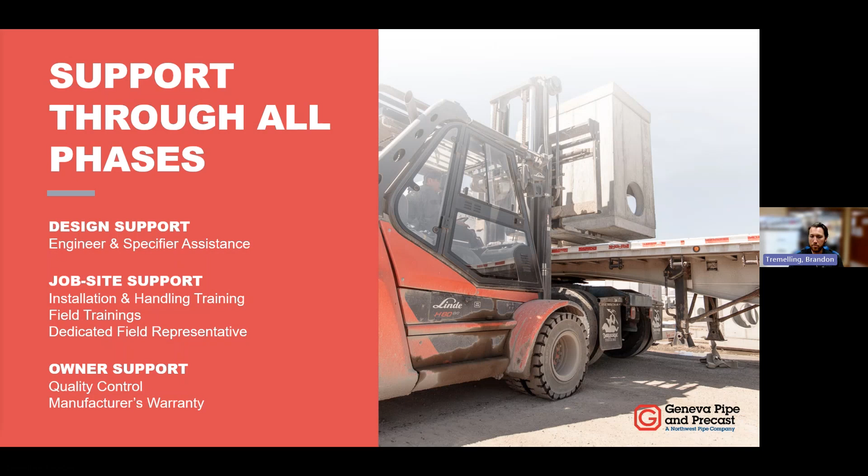And now I'd like to see if we have any questions in the Q&A. I've been a little busy giving the webinar to keep track of that this whole time.